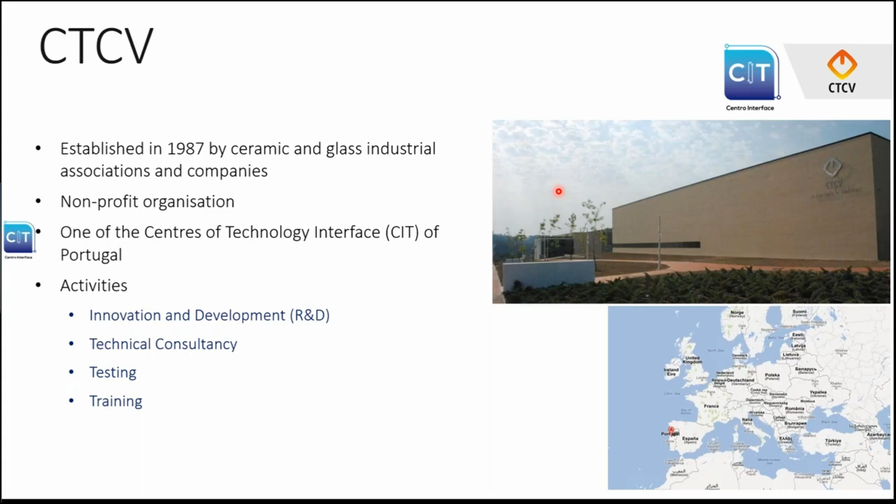So our activities are divided into 4 main areas: the one that I come from, innovation and development, technical consultancy, testing, and training.

We are located in a city in the central region of Portugal, Coimbra, and those who intend to visit Portugal can pass through this city. We will find a huge and wealthy cultural heritage because it was one of the capitals of our country. So you are invited to visit our city.

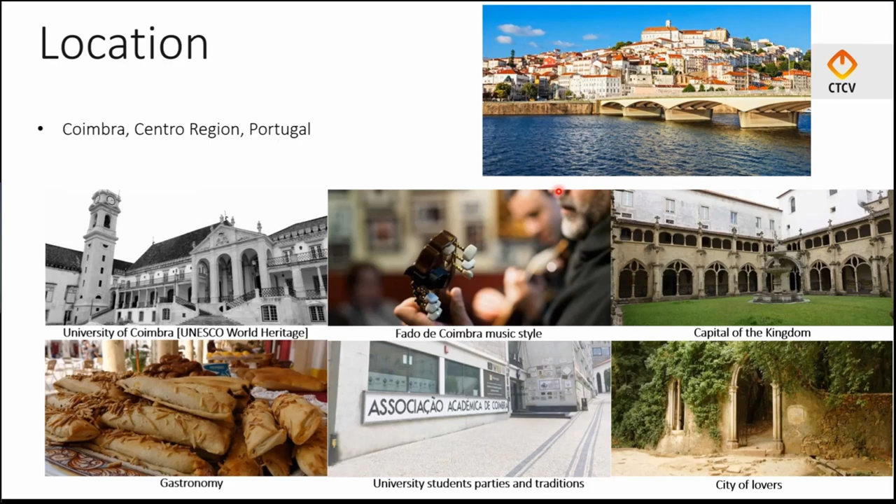At CTCV, we are 60 collaborators, and we supplied services for more or less 550 customers last year. We are an accredited organization for supplying services under Portuguese financial instruments. Nowadays, we are participating in more than 20 R&D projects from Portugal through Europe, and we are a member of national and European clusters like the Pôle Européen de la Céramique.

In my department, our mission is to develop technology. So we make industrial research, development, and innovation, starting from technology readiness level 4 to the last level, 9 - starting from lab scale technology validation to systems approved in production.

So we take the science results from academic institutions and try to develop them to the industrial level. We also provide services in intellectual property and technology transfer, and of course we participate in many R&D funded projects under the Portuguese framework and also under the European framework.

So let me give an overview of powder injection molding technology. It is a group of technologies for component production. We can process metals, ceramics, and cemented carbides. Ceramic injection molding is one of the fields of powder injection molding, as you can see in this scheme.

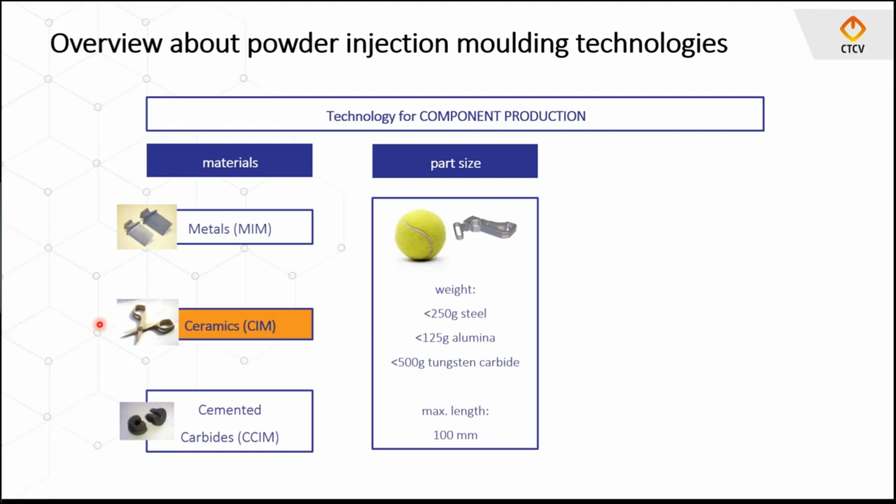So there are some boundary conditions to look for when considering a part for ceramic injection molding. Usually there's a rule of thumb that says the part can fit inside a tennis ball - so we're talking about a part up to 125 grams in alumina in the case of ceramics, and there are some limitations in the maximum length, around 100 millimeters.

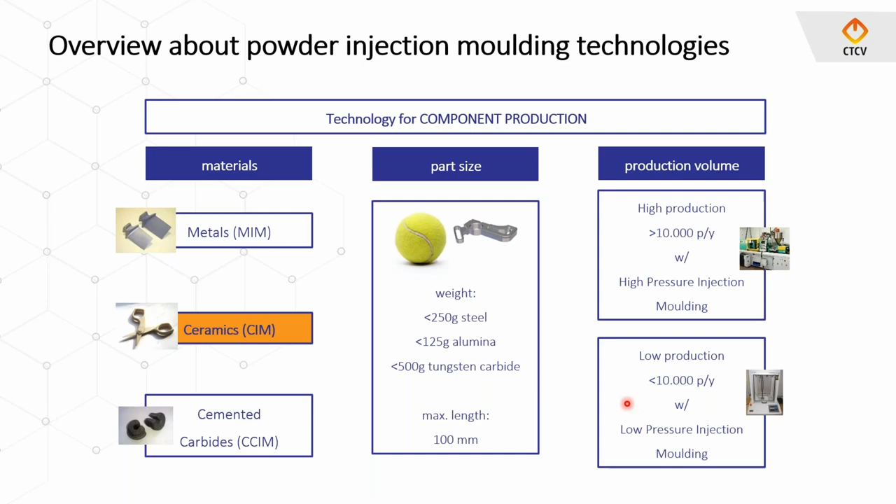In terms of production volume, there are two divisions of ceramic injection molding. When talking about high pressure injection molding, we're going for high production series, starting from 10,000 parts per year. When you want to go lower than that figure, we can use low pressure injection molding technology. I will talk about these two types of machines.

So this is the process flow, starting from powder and ending in sintered parts. Generally, we can find four main advantages in ceramic injection molding. It is a one-step shaping process for very complex part geometries.

It is a cost-effective production route for difficult-to-machine materials, and again, it is applicable from low to high series production. Usually in the shaping step, we use up to 100% of raw material, so we are virtually non-scrap in the shaping step.

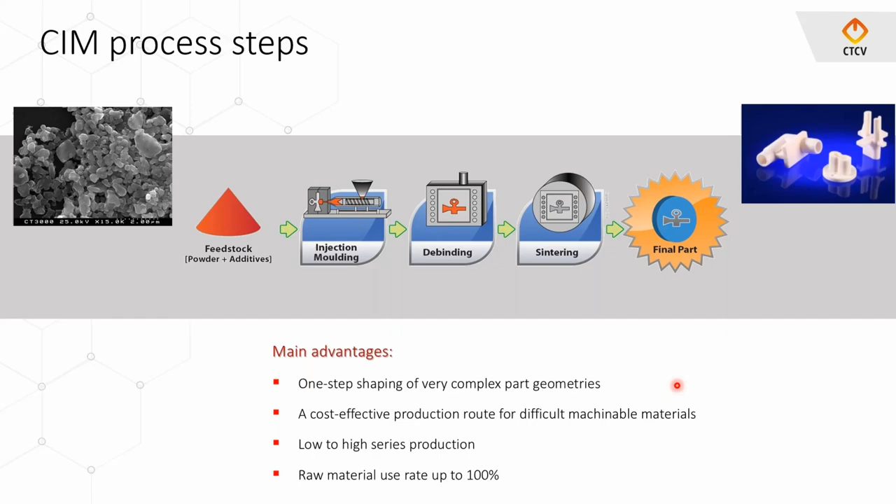So how do we consider a component as a ceramic injection molding candidate? This is a generic table to look at a part and see if it can be produced by ceramic injection molding. Usually we're talking about maximum limits. For alumina parts, we can consider a maximum of 125 grams, wall thickness of 8 millimeters, and maximum linear dimension of 100 millimeters.

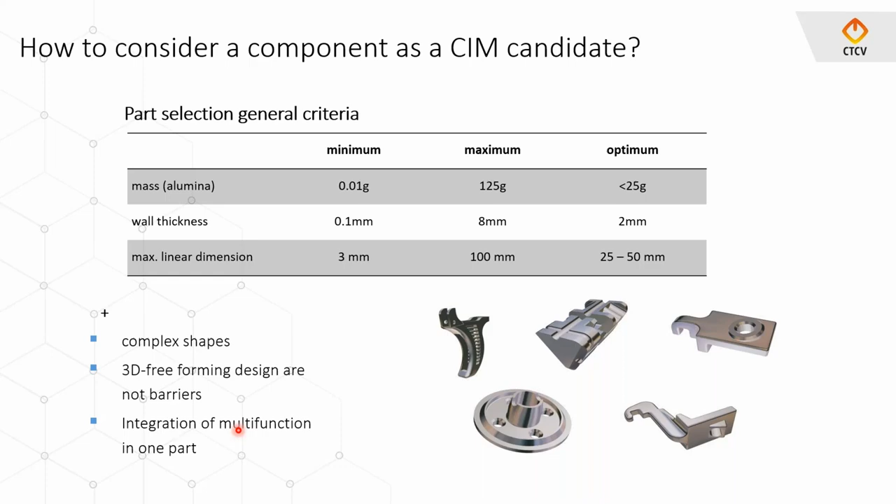But if we want to find the correct part for ceramic injection molding, we need to join these geometrical types or issues. We need to have complex shapes, we can make 3D free forming design, and integrate multifunctional aspects in the same part. It's very important to make ceramic injection molding very competitive against other technologies.

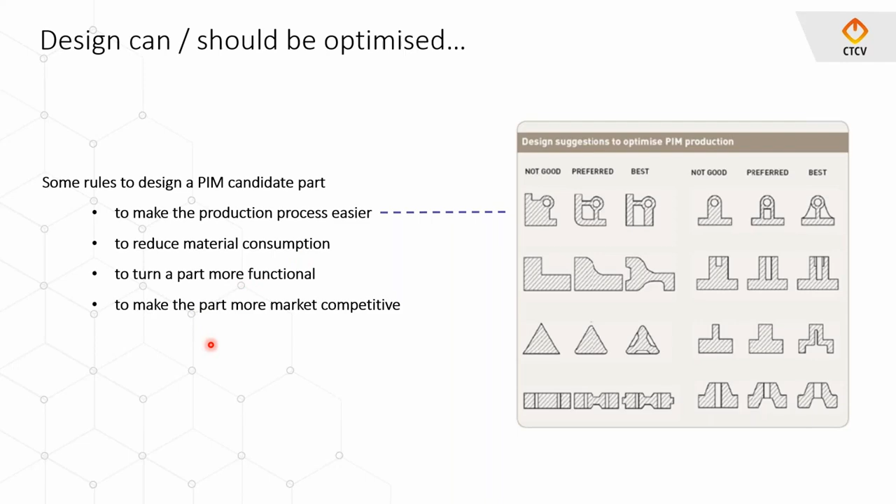There are some rules we can use to make the production process easier and to reduce material consumption. For example, we can redesign parts that were made by pressing and machining, which is very costly. We can make redesign manipulations and convert it to ceramic injection molding. We can use these rules to reduce material consumption, make the part more functional, and more market competitive.

In terms of materials for ceramics, we're talking about oxide ceramics, the main majority of materials transformed by ceramic injection molding in the market. We're talking about alumina, zirconia, and composites between these two ceramics. It's also possible with nitride ceramics, and it has been done, as well as silicate ceramics like steatite and porcelain. So it's possible to apply this technology to any ceramic that is sinterable.

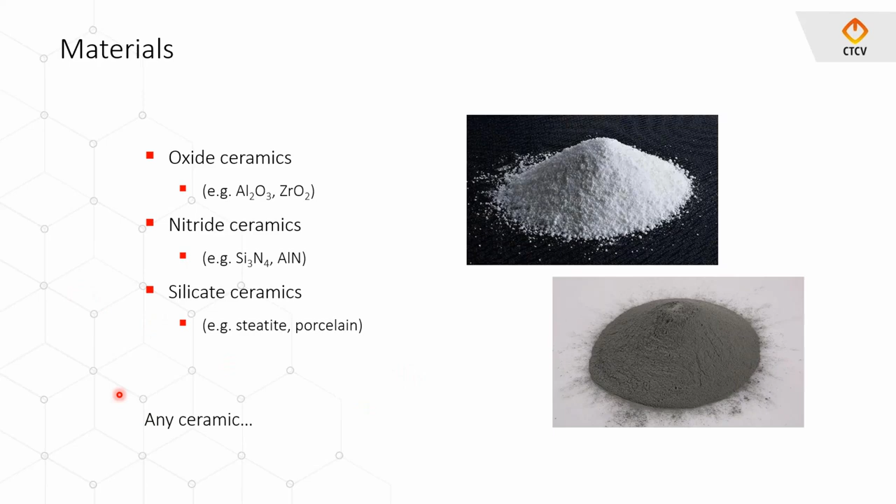These charts tell us the application areas in terms of production quantity and shape complexity. Ceramic injection molding sits in this corner of the chart, where we have high complexity of component shape and high production series. Here you can see the difference between high pressure ceramic injection molding and low pressure ceramic injection molding - again the difference is about the quantity of production.

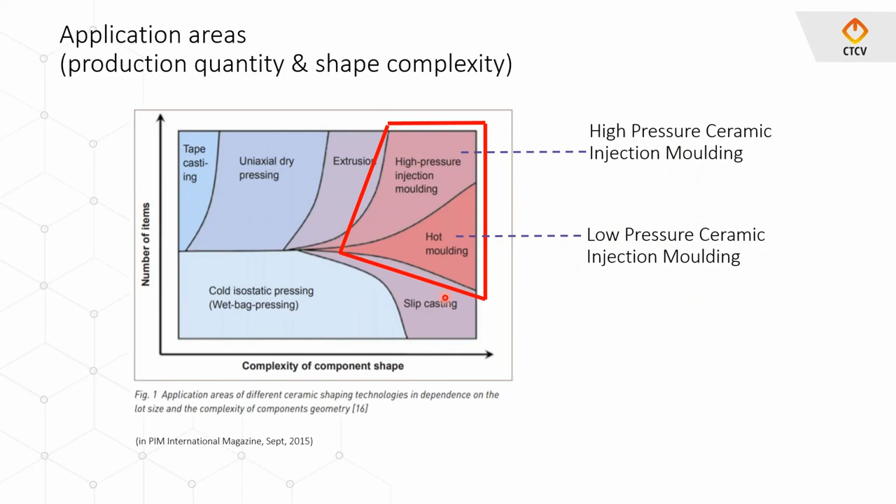What is the application of ceramic injection molding in terms of kind of parts? We're talking about machinery parts, automotive industry, medical instruments, electrical tools, watches and jewelry, microsystems, electronics. So it's a wide range of application sectors - it's a very flexible technology.

Here you can see four examples of parts. This is alumina casting cores, a very old application of ceramic injection molding, used when producing turbine blades in metals, namely inconel alloys. This salt grinder is also a very typical product produced by ceramic injection molding, as well as these zirconia watch parts, very commonly found in the market, and also a typical example in textile machinery parts.

So any kind of application where we find wear, high temperature, and of course, as you can see here, there is a lot of complexity in the part design.

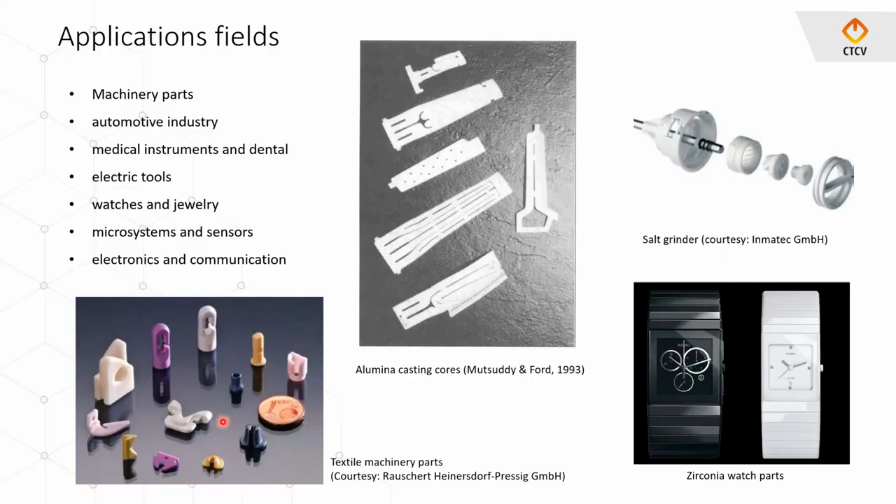Let's go deeper into the production process steps. We start from the feedstock, which is a mixture between the powder and polymeric additives, and we shape it by injection molding. Then we remove the majority of the binder, and go to the sintering process to get our final part. This final part is in a sintered state, but can be finished by conventional technologies like grinding, polishing, and any kind of hard machining - it is possible to finish the parts.

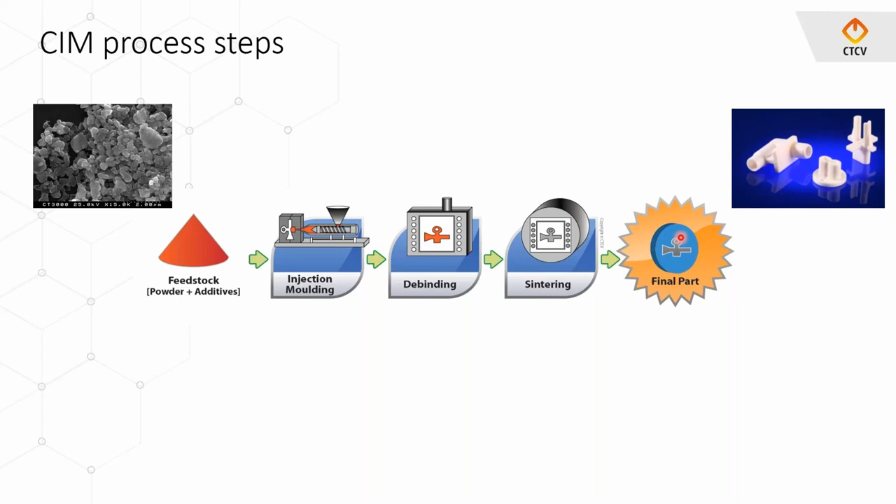So the first step is feedstock compounding, and let me tell you that if a company wants to go for ceramic injection molding production, it can choose between two ways: to produce the feedstock in-house, or to go into the market to buy the feedstock ready to mold. This step is not obligatory - they can choose whether to invest in feedstock compounding or to buy the feedstock outside.

In this process, we mix the powder into the binder. It's a warm, hot process, and we want to homogenize the powder through the binder to get the feedstock in granulate form. Usually we use ultrafine powders in ceramics, so usually less than 1 micrometer.

About the binders - the binder is a multi-component polymeric-based mixture, and it should be tailored for the specific ceramic. Mainly the dispersion and additives are found to be different from powder to powder, or at least from oxide ceramics to nitride ceramics. So we have to choose, find, and develop the right binder composition for any kind of powder.

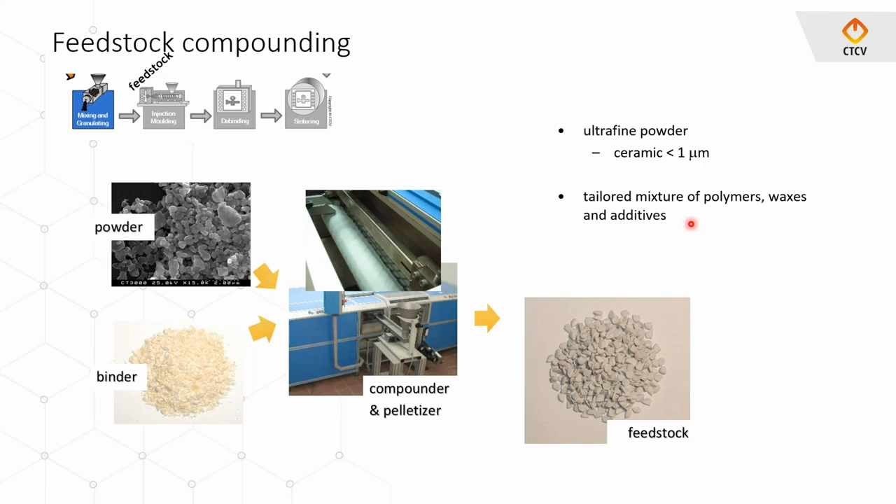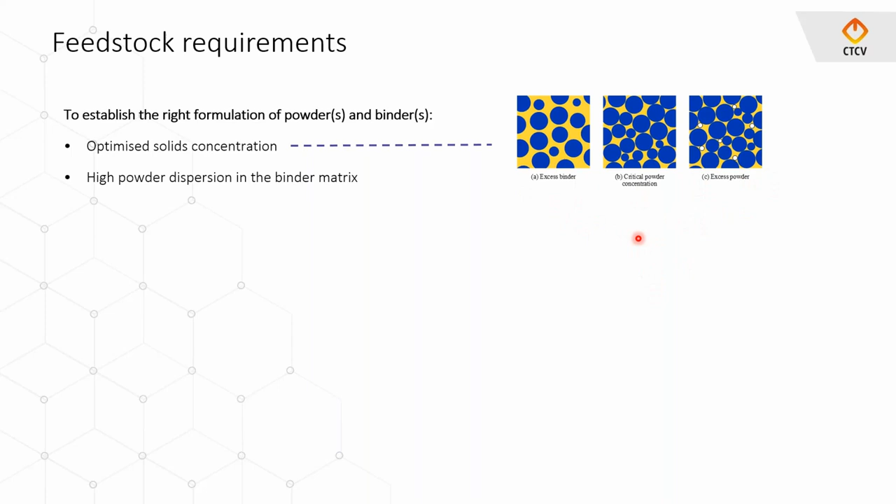Okay, so the feedstock is a very critical component in this technology, and I will point out some aspects of the feedstock. So we have to optimize the solid concentration. We don't want to have excess binder nor excess powder. We have to find out the precise optimized concentration. Of course, we have to have homogeneous dispersion of the powder through the binder matrix.

And of course, we have to promote, to plan for a fast debinding with no part defects. So when we are developing the binder, we have to put our mind through the debinding as well, to avoid part defects and to speed up the debinding as fast as possible. And of course, we have to promote a high density of sintered material with no part defects, and the binder can be critical for this issue as well. And at final, of course, we have to find out the right sintered materials properties, in order to accomplish the part specification.

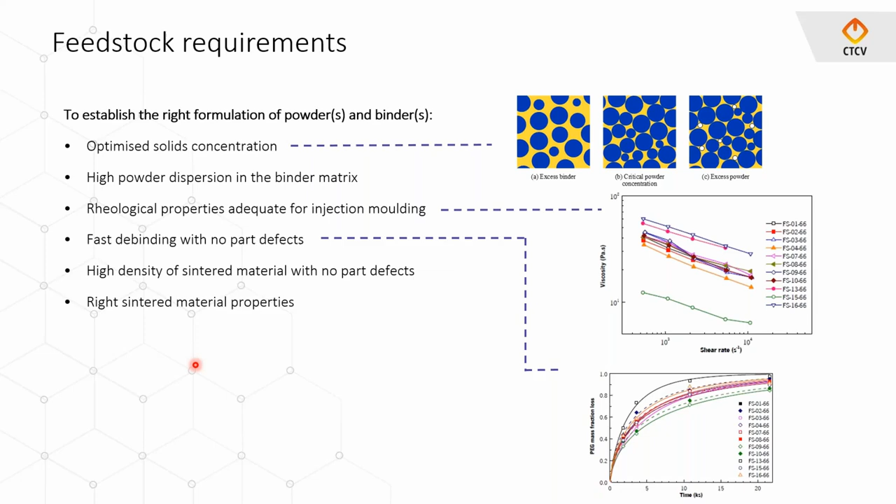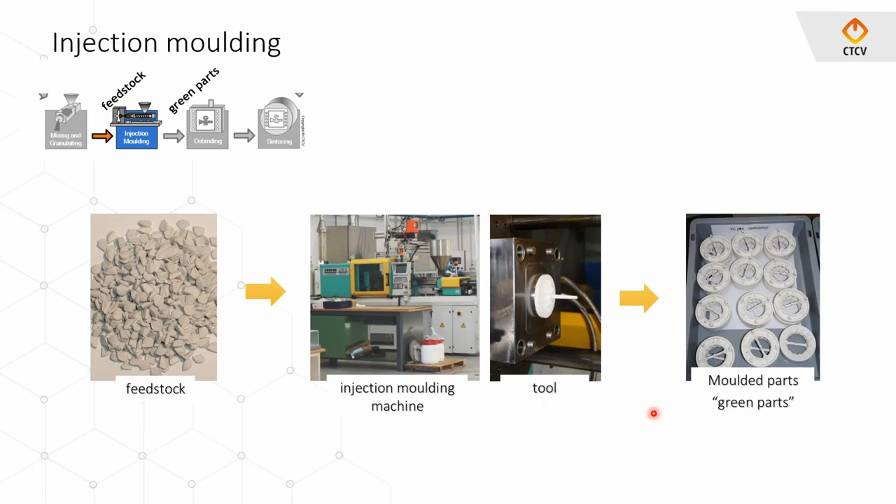So in the injection molding step, we process the feedstock by melting and cooling down inside the tool, and then we get the green parts, the molded parts, after this step.

So the injection molding can be performed with this kind of machine. In this scheme, we have a high pressure injection molding machine, which is very similar to plastic injection molding machines. We've got the tool inside, and we have the plastification unit here. And in this machine, we have the injection molding cycle, composed of the movements of the machine, the filling of the tool, the packing of the feedstock inside the tool, and then the cooling of the part inside the tool. And then, of course, the tool will open up and the part is extracted by a robotic arm.

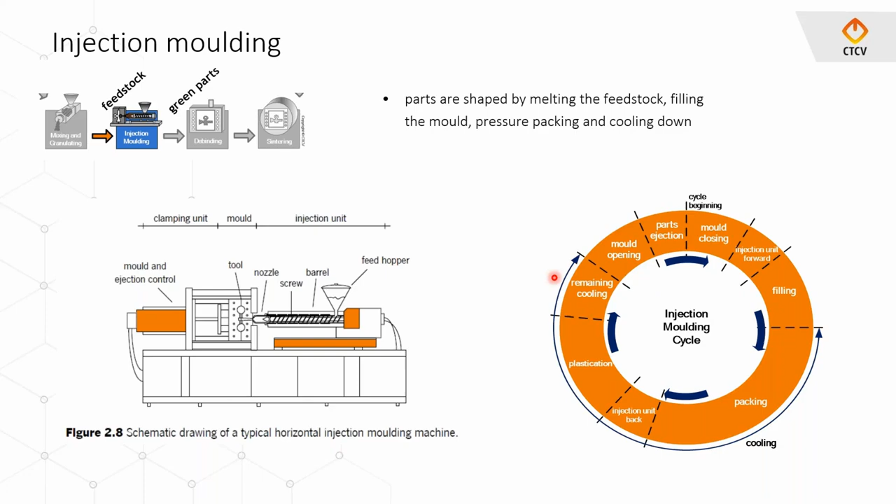So this high pressure injection molding machine is a very productive way to manufacture the parts, like in plastic injection molding.

Here, we can split the injection molding step between two kinds of steps. It depends on the machine that we use. If you use this kind of machine, a floor stand machine, a big machine, we use big steel tools with hundreds of kilograms, so we're talking about a cost of tool comparatively high. That's why here we can use this technology for large production capability.

If you use this smaller machine, which is a benchtop machine, we use pressures of injection molding lower than 50 bars, and then we can use very small tools, not so complicated like these ones in high pressure. You can see here what is the size of a tool compared to the hands of the operator. So the tools are not so costly, and then we can make prototyping, and we can make short production capability. So it depends on the strategy of the company, and it depends on the production series for the part in question.

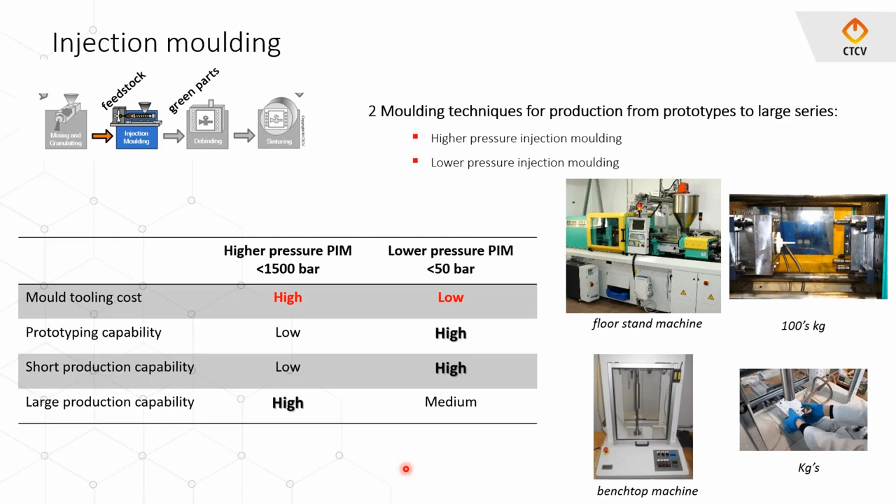Here we have a comparison between two tools, between the high pressure injection molding and the low pressure injection molding. You can see here in the same scale what is the difference we are talking about, high pressure versus low pressure. That's why we have a high expensive tool in high pressure and a low expensive tool in low pressure, okay?

So the cavities of the tool should be oversized to compensate for the shrinkage during sintering. You can see here an example of what is the range of shrinkage in alumina. We're talking about between 15 and 25% of linear shrinkage.

And of course, if there is anyone assisting this presentation from the plastic molding industry or tooling, the tools are, let's say, 50% similar to plastic molding, but there is a critical aspect to change from the plastic world to the ceramic injection molding tool.

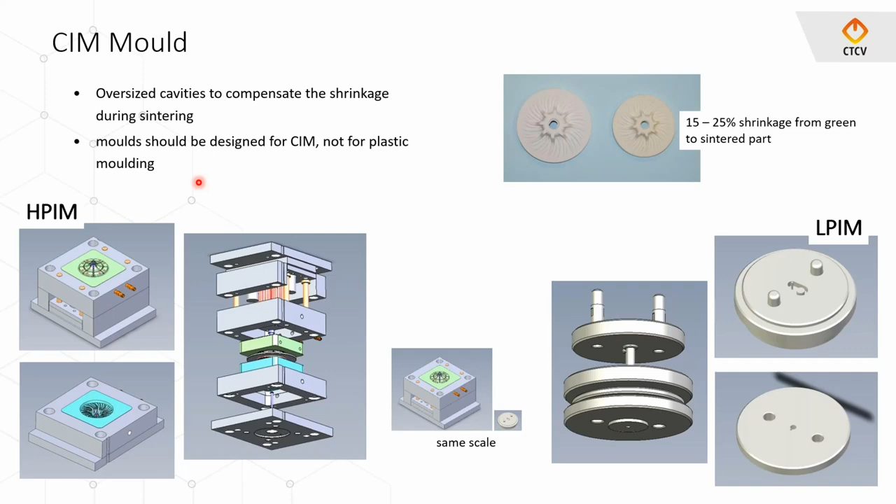So the next step of the process is debinding, where the binder is removed by several different methods depending on the specific binder's chemistry. So I will present the common methods to remove the binders.

There are some binders composed of wax and polymers that can be removed by a thermal way, where the parts are warmed up until the polymers start to degrade by a thermal process.

We can remove the binder by a catalytic method. This is applied for the binder based on polyacetal or polyoxymethylene, and so the parts are warmed up in an acidic atmosphere, but the temperatures here are more or less 100 degrees, whereas in the thermal way we go through 300, 400, 500, 600 degrees. So this is a quite quick method for removing the binder.

And there are several other methods. Solvent method, when we have a wax and a polymer, but the wax is soluble in organic solvent. So we put the parts immersed in organic solvent and wait for the dissolution of the wax part.

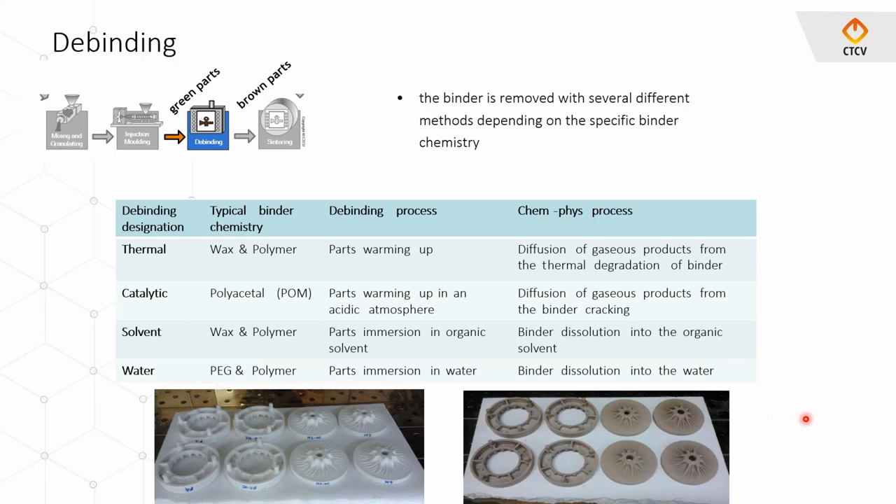After debinding, we proceed to the last step, sintering, which is very common in the ceramic world, as everyone knows. And typically we have a thermal profile starting with the phase of binder burnout.

In the debinding phase, we don't remove the whole binder. We keep some 5 to 20% of the binder to go through the sintering furnace in order to retain the shape of the part.

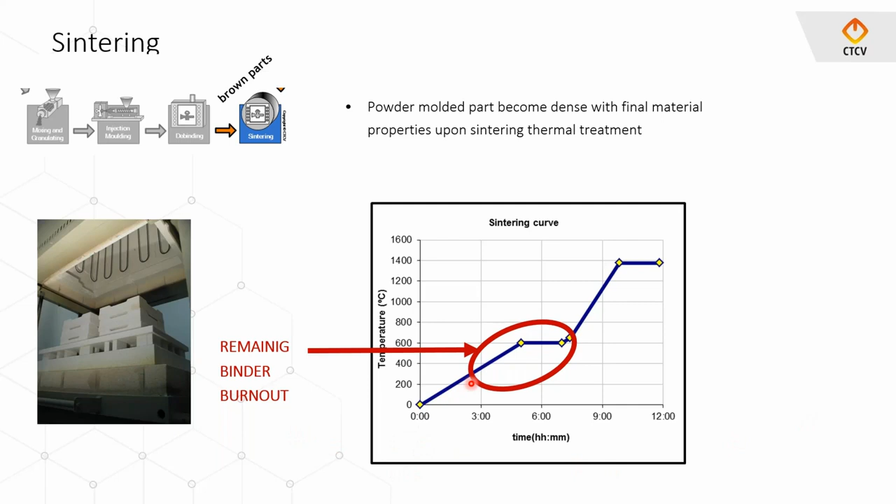So we need to slowly heat up the parts and wait until the binder is burned out in the first phase, then go to high temperature and perform the sintering, as I think everyone in this audience is experiencing.

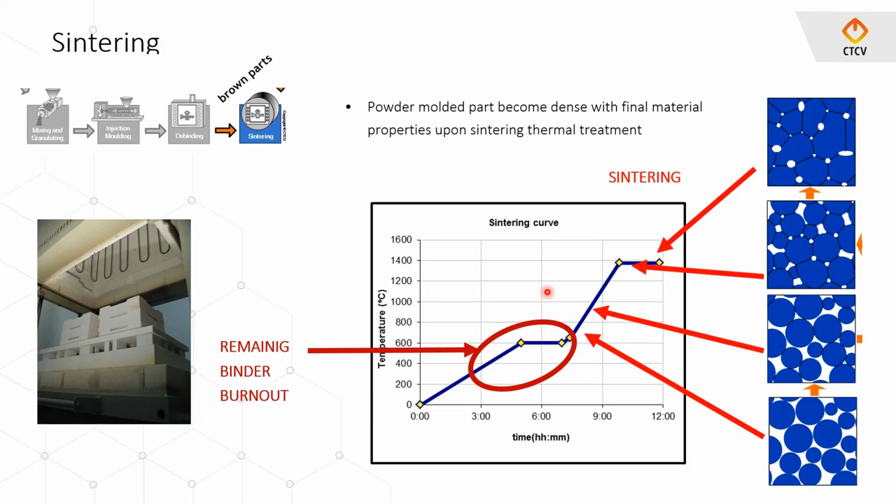We are experienced, to be honest, in alumina and zirconia, and in composites of these two materials. We also have tungsten carbide, which we can consider a ceramic due to its hardness. We have some experience as well in cemented carbides with cobalt as the binder.

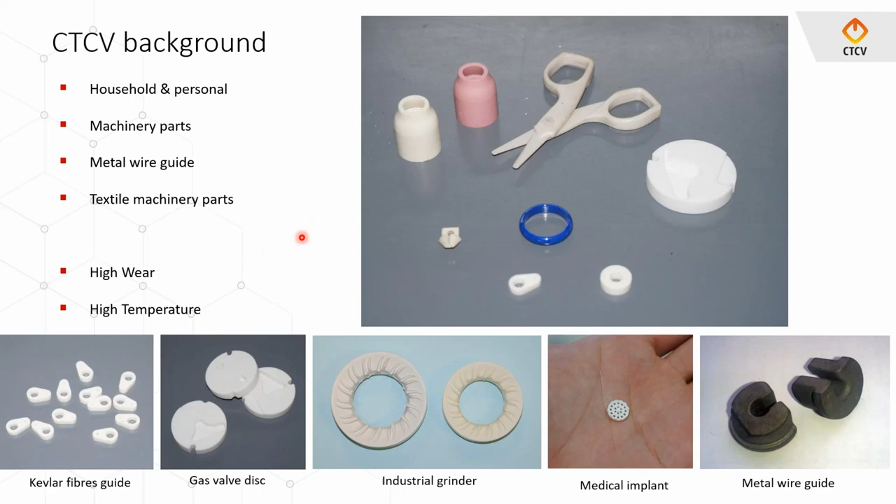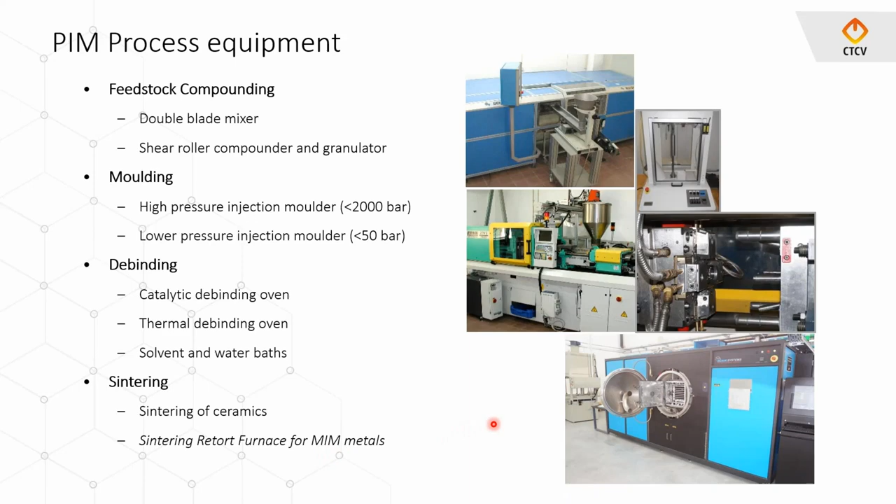We can also do metal injection molding and especially the sintering of metals. If anyone is interested in metal injection molding as well as ceramic injection molding, I can tell you we are also working on that.

Of course, we have a huge list of R&D and laboratory equipment for service providing. In ceramic injection molding, it is very critical to control rheology and the powder as starting material, and there's a huge number of techniques for laboratory characterization.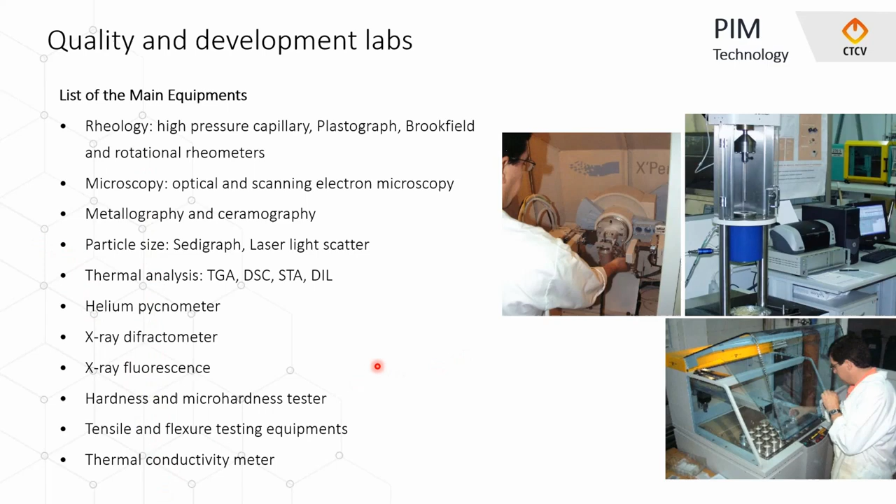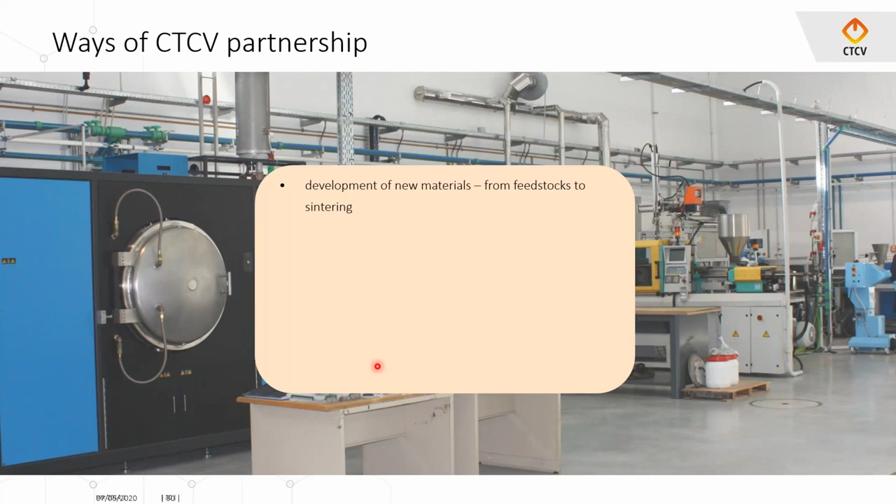Let me list some ways of CTCV partnership. We can develop new materials for ceramic injection molding, starting from feedstock to sintering, going through the whole process. We can test the technology and produce samples for companies who want to test new part production.

We can make material characterization and testing, of course. We can make toll processing, so we can be contracted for compounding, debinding, molding, or sintering, and we can support mold concept and design.

If there is a company or laboratory that has all the facilities but doesn't know exactly the technology or how to design the tool, we can support in this area.

At last, our powder injection molding pilot plant can be used for technology transfer to industry, and we can also support starting up a new business in powder injection molding.

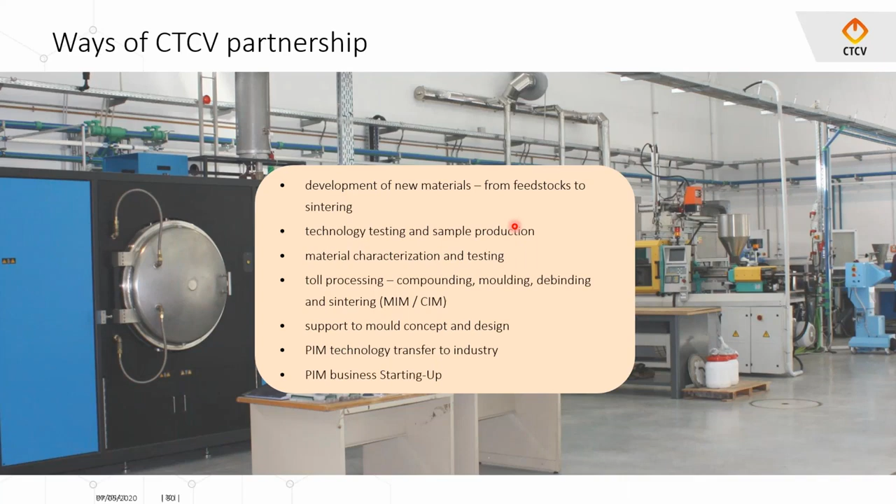We never forget these partnership options: if you want to go to large production series with high pressure injection molding, or low pressure injection molding technology for low production series. Sometimes it's a question of decision, sometimes it's an opportunity depending on the part being manufactured.

If the part is for low series, we choose low pressure. If it is for high production, we go for high pressure.

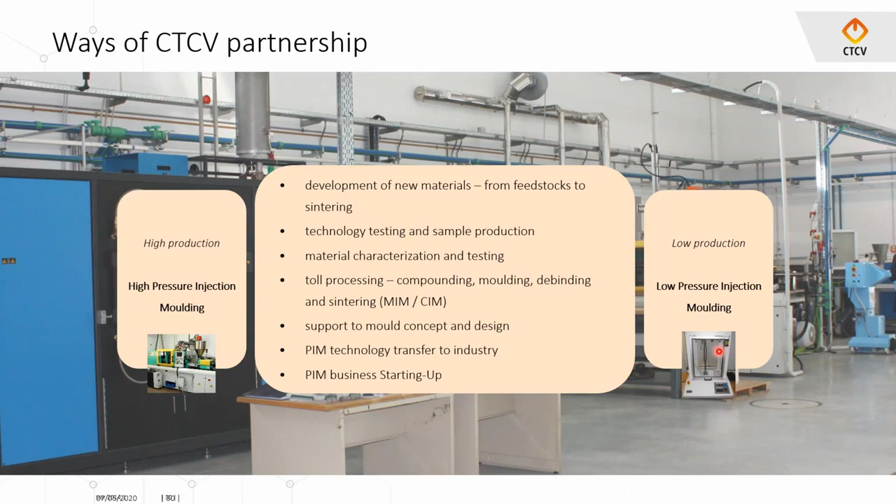And of course, not only ceramics—I can advertise some other materials. Ceramics, and if there is someone interested, also metals and cemented carbides.

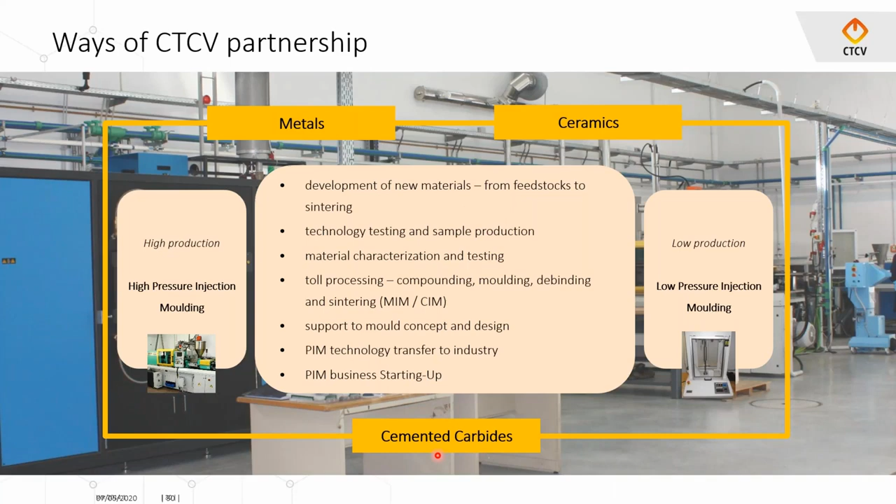Okay, so this is my last slide. I hope this presentation will be useful for you, and I am at your disposal to answer any questions.

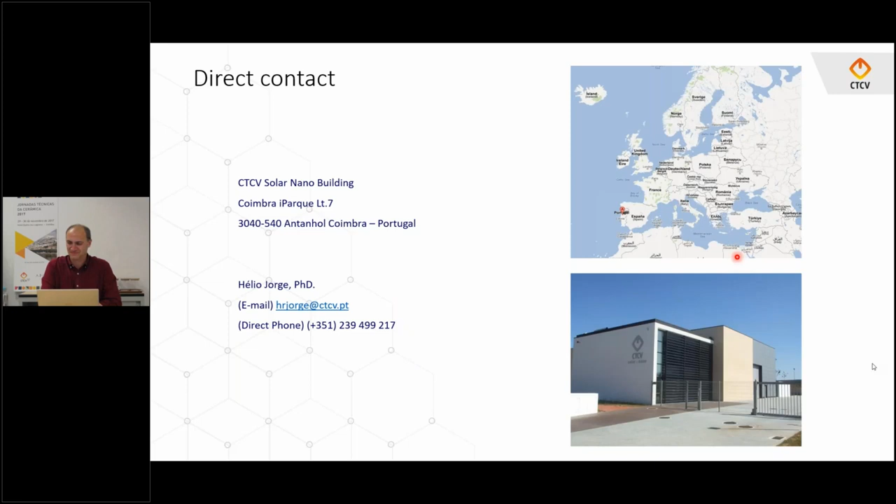No, everybody says thank you, Helio. Okay, thank you very much. Thank you, Alexandra. You're welcome, have a nice day to all. Have a nice day, everybody.